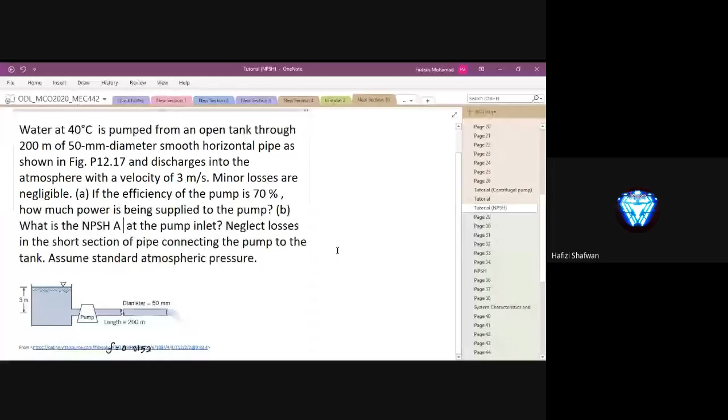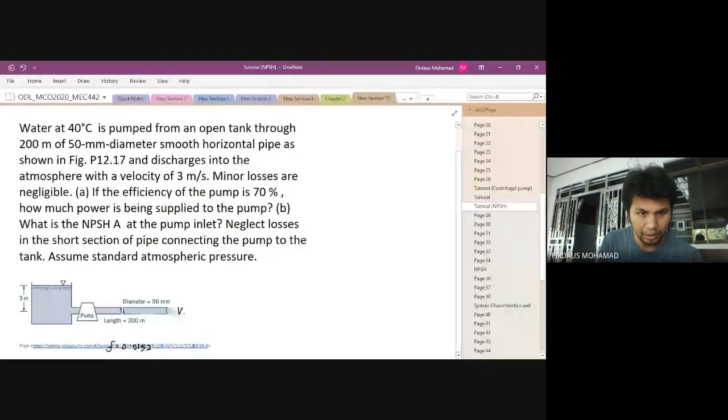Water at 40 degrees C is pumped from an open tank through 200 meters of 50 millimeter diameter smooth horizontal pipe, as shown in this figure, and discharged into the atmosphere with a velocity of 3 meters per second. So water will be discharged here, let's say this one, V2 is 3 meters per second.

Minor losses are negligible. So what is minor losses? In the video I already explained what is minor losses. Anyone can answer?

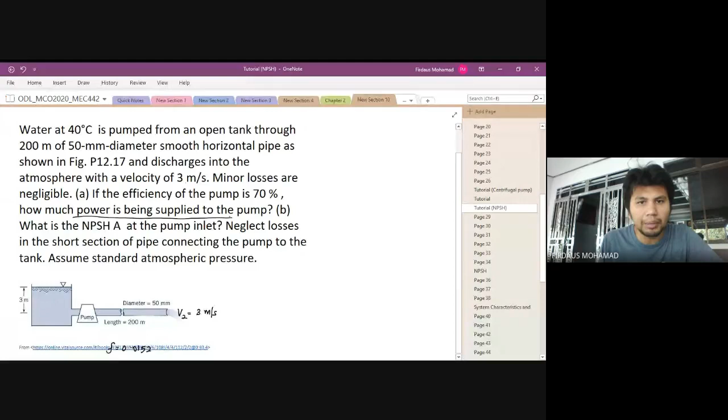So if the efficiency of the pump is 70%, how much power is being supplied to the pump? And then B, what is the NPSH?

Net positive suction head available at the pump inlet.

And then neglect losses in the short section of pipe connecting to the pump from the tank. Assume standard atmospheric pressure.

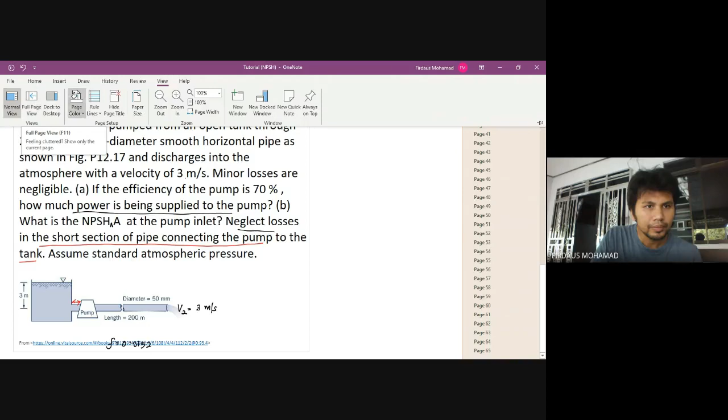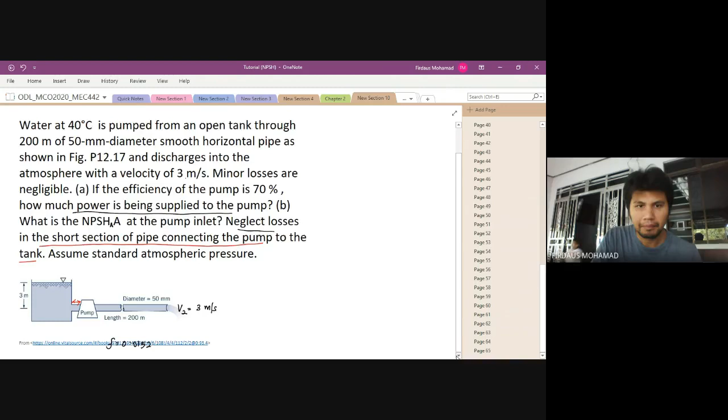So now, the problem statement. Given...

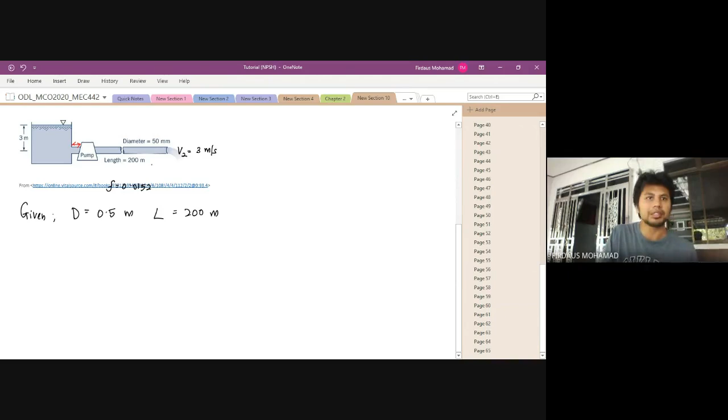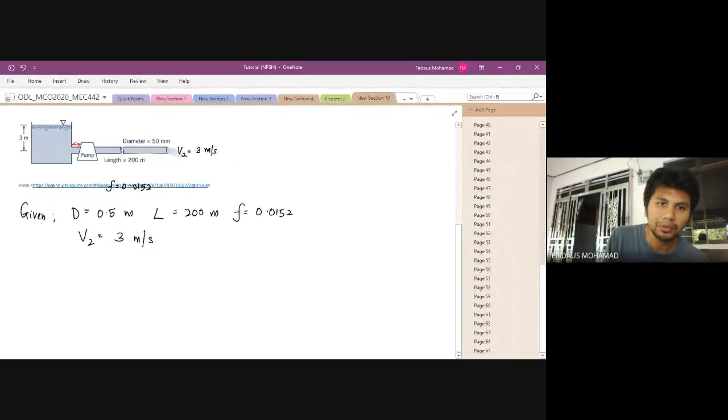Diameter for the pipe is 0.5 meter, and length for the pipe itself is 200 meters. And below there is F. What is F? Frictional factor, used to find the major losses. So F equals 0.0152. And then V2 equals 3 meters per second, the velocity for the water discharged to the atmosphere.

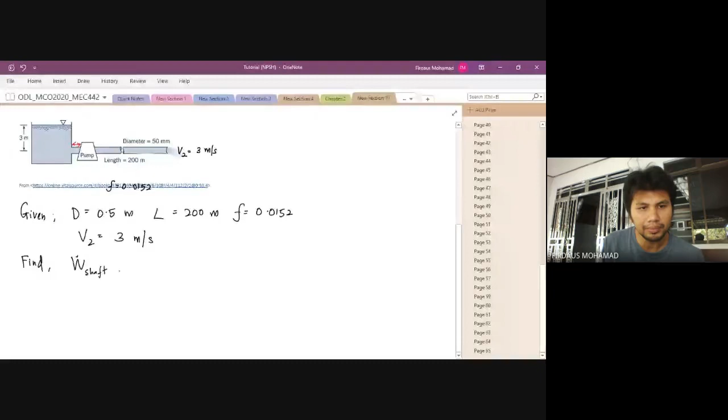So first, find this, W dot shaft. Second, B, this is what? NPSH available.

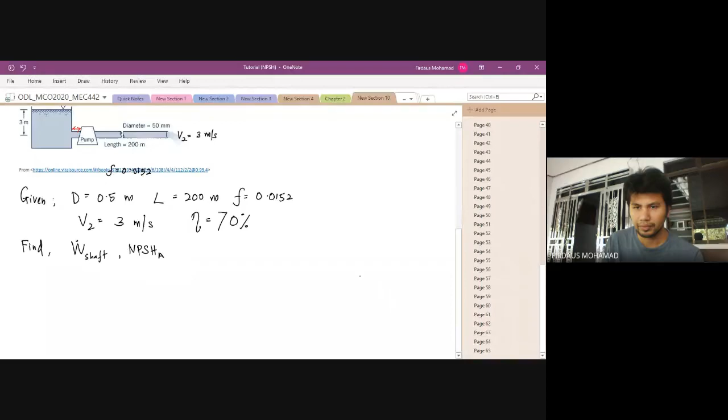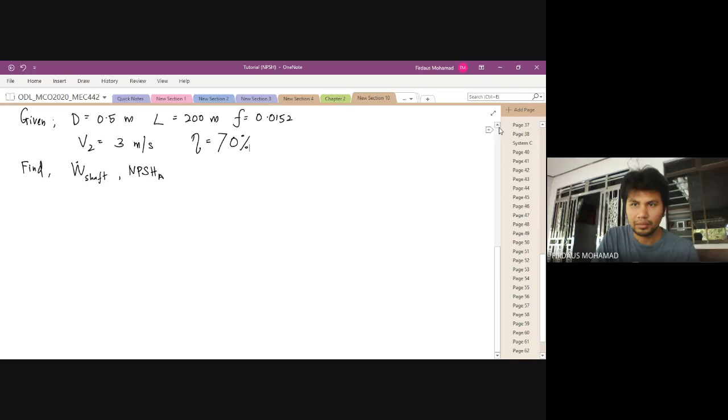So first, for the solution, first, how to find the W dot shaft.

So we know efficiency, check back in your notes, efficiency equals PF, power gained from the fluid, power from the pump, divided by W dot shaft - how much power is supplied to the pump from the shaft. So that means W dot shaft basically equals PF divided by efficiency.

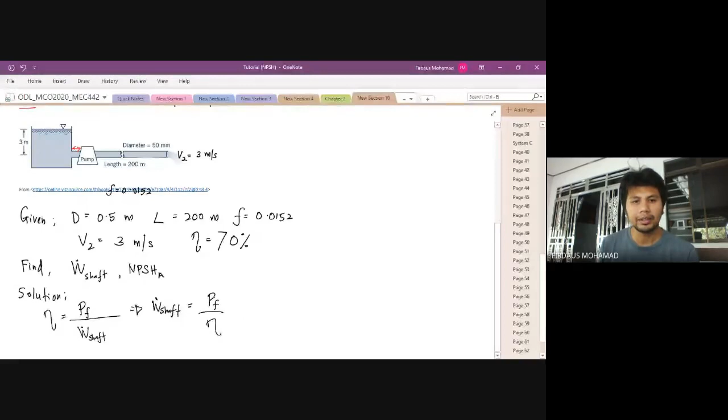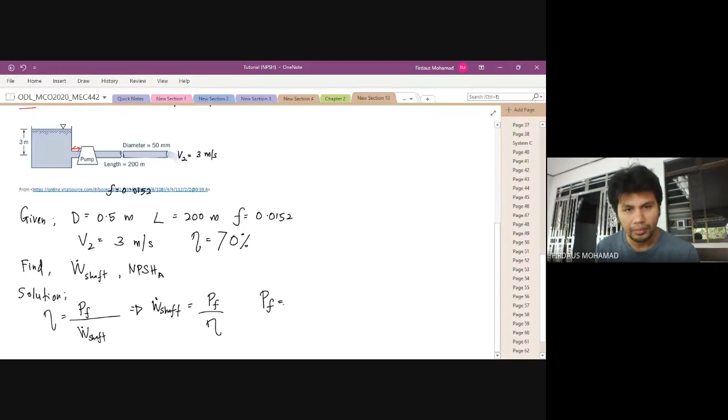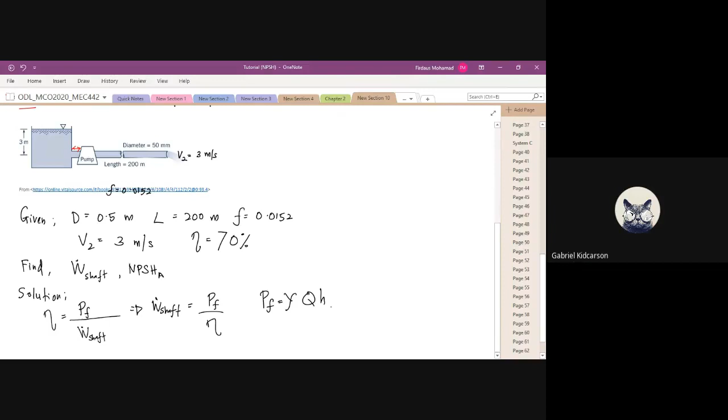And then to find PF, power for the fluid, PF equals gamma times Q times HA. HA or H pump - what notation do you want to use? Let's just use HA. So HA or HP is the same, head available for the pump or head pump. So gamma is specific weight, for water this is 1000 times 9.81.

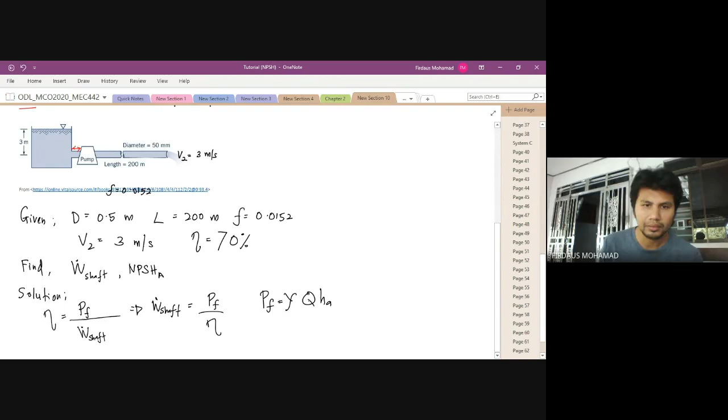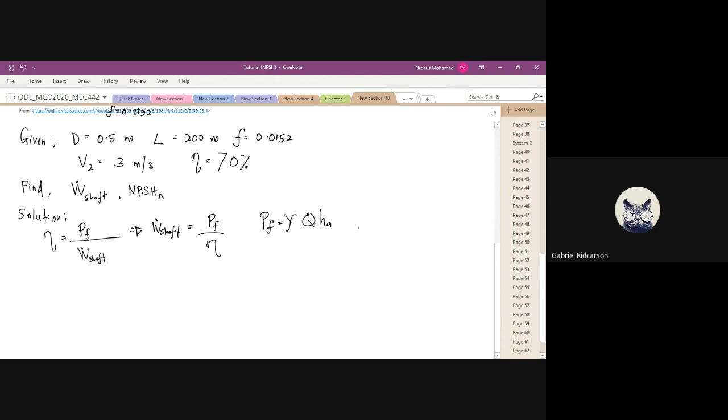Q, we can find Q. Q equals A times V. A comes from the diameter of the pipe. So you'll get area as pi d squared over 4, multiplied with velocity.

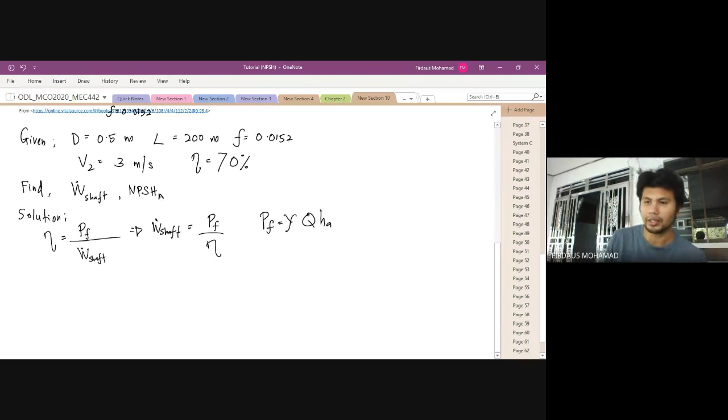So now what we need to find is HA, the head available for the pump. To find HA, let's look back at our schematic diagram. Let's say this is point 1, and this is point 2, the discharge point. So the Bernoulli equation...

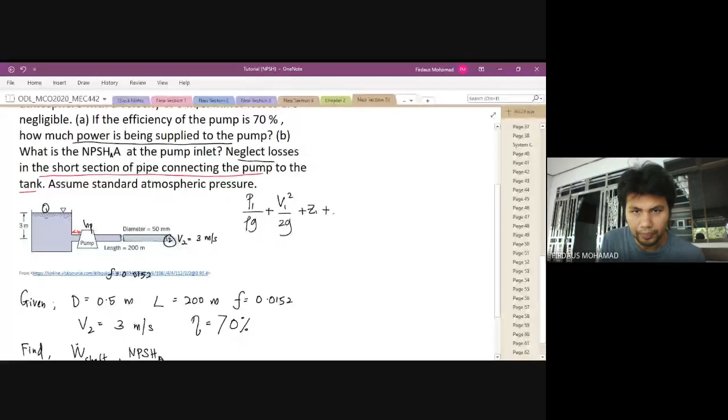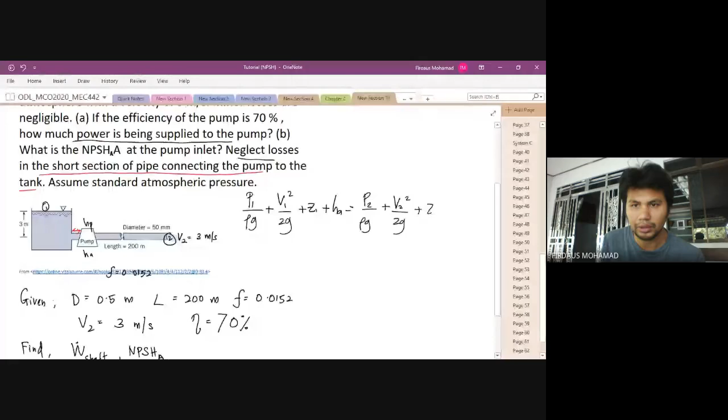P1 over rho G plus V1 squared over 2G plus Z1, plus head for the pump or HA, equals at point 2: P2 over rho G plus V2 squared over 2G plus Z2 plus sigma HL.

So HA basically equals P2 minus P1 over rho G, plus V2 squared minus V1 squared over 2G, plus Z2 minus Z1, plus the losses. What losses do we have now? Losses due to friction, the major losses: friction F times L over D times V squared over 2G.

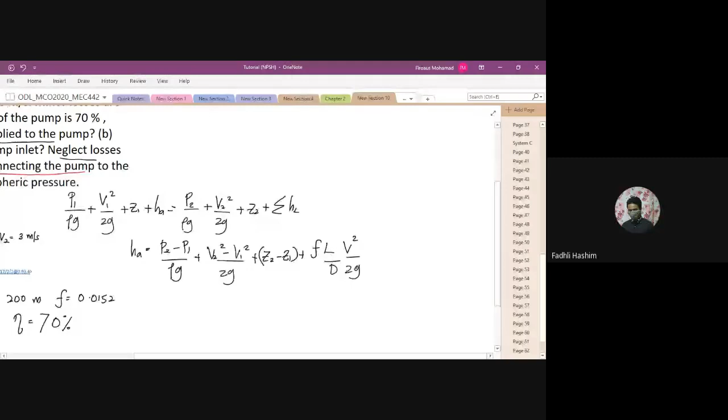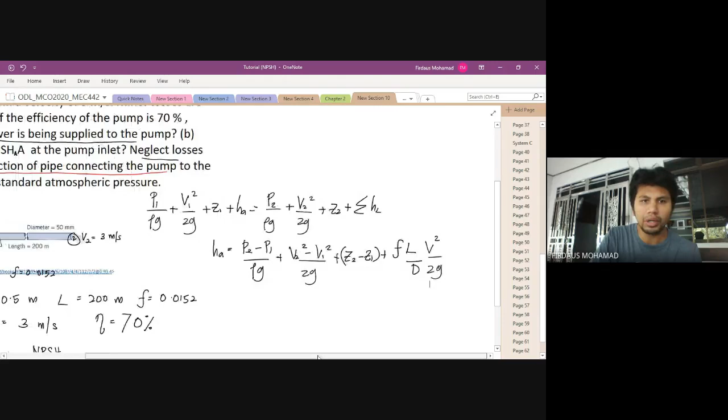Okay, now let's look back at the question. Assume all at atmospheric pressure, meaning P at point 1 is also atmospheric pressure, and P at point 2 is also atmospheric pressure. So P2 and P1 are the same, and we can cancel this since P2 equals P1, atmospheric pressure minus atmospheric pressure.

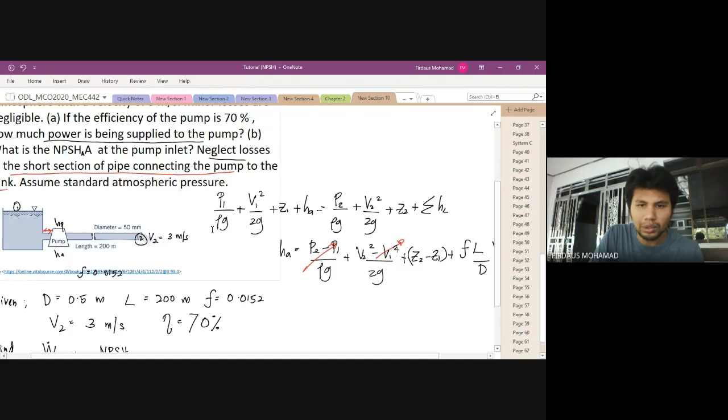And then for V2, we have V2. For V1, we have zero, because it's an open surface. And then Z2, we assume the datum is at point 2 - yes, he has already set the datum at point 2. So it's zero minus 3, plus FL V squared over D 2G for the major losses.

So now for the pump, head available for the pump equals V2 squared - V is 3 squared - over 2 times gravity 9.81, Z2 is zero, minus 3, plus F...

F is 0.015, length is 200 meters, diameter is 0.5. So how much is HA?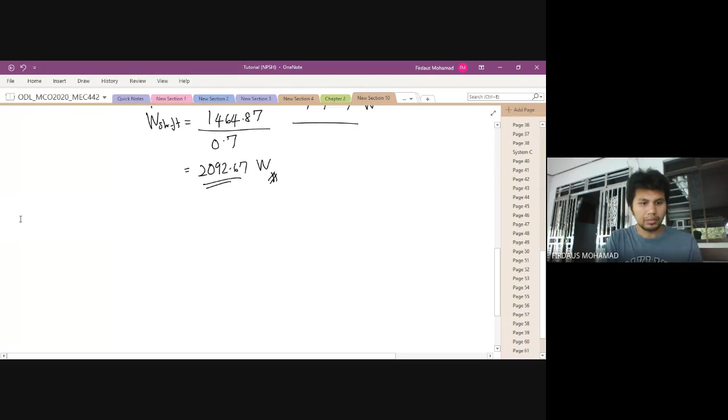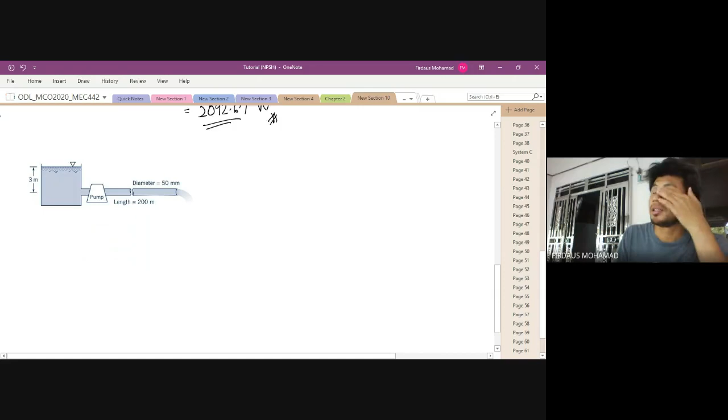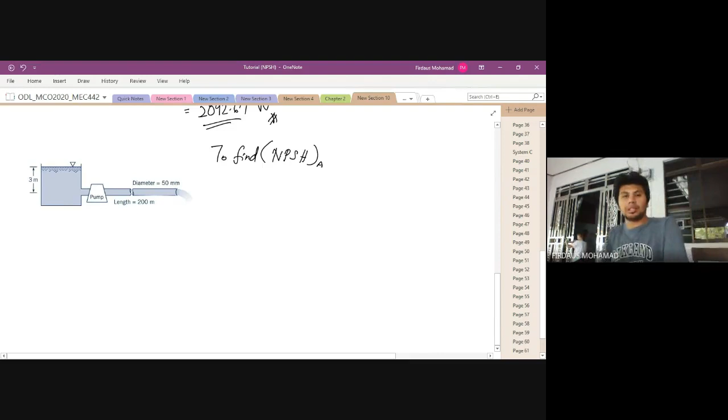So kita sekarang ni kita nak cari net positive suction head for the pump. Okay, so to find for this pump. Kenapa kita, why we need to find this NPSH? So apa? Why we need to find this net positive suction head for the pump? Dah tengok video.

Okay, so we need to find this net positive suction head because we need to find the vapor pressure for the water. Okay, mean that we need to find what is vapor pressure at that condition for the pump for the water, so that no bubble ataupun cavitation will occur inside, will happen inside the pump. Okay, once the cavitation happens, okay, so your lifespan for the blade, okay, for the pump will become much shorter. Dia akan damage your blade. So that's why we need to find this net positive suction head, okay, for this pump.

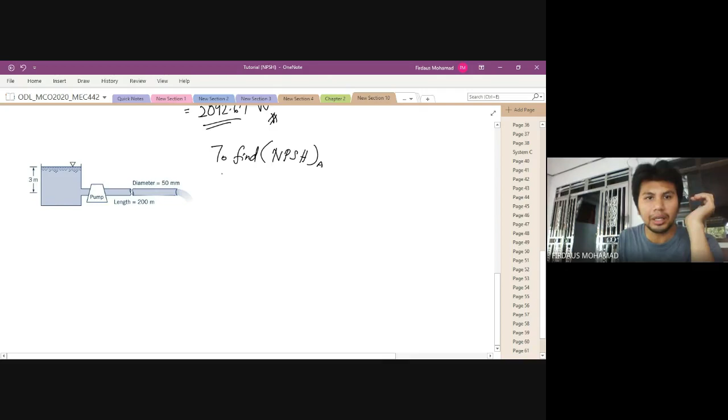Okay, so now given dibagi apa? Dibagi water at 40 degree C. Okay, so mean that you need to find what is the vapor pressure PV at this 40 degree C. So how to find the vapor pressure at 40 degree C? Kita guna apa? Kita kena guna apa? Nak cari water at vapor pressure, kena guna property table kan. So kalau thermodynamic atau thermal, you akan dapat property table. So sekarang ni you tak ada, you just Google.

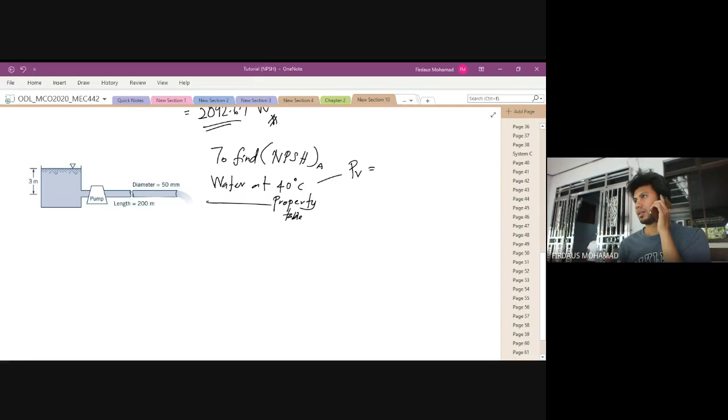So at 40 degree, kalau tengok property table, vapor pressure is 7.375 kilopascal. PV equal to 7.375 kilopascal. And then density for water at 40 degree C, density untuk water at 40 degree C, 992.25.

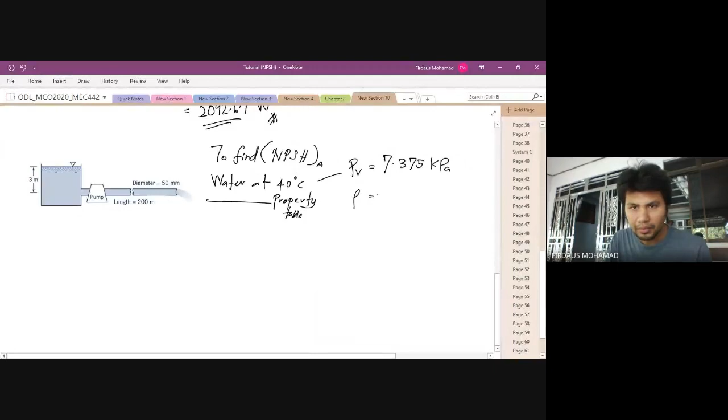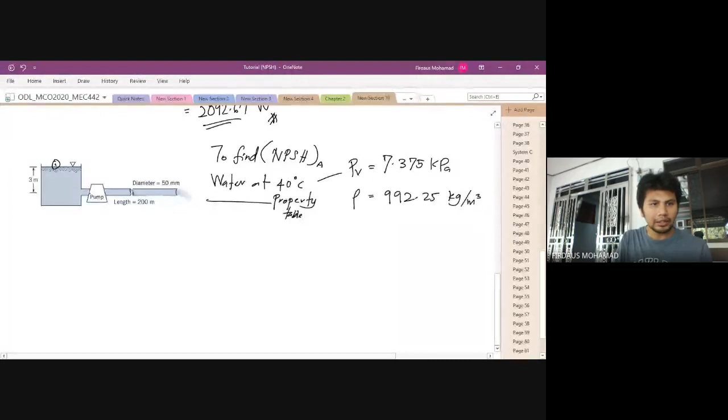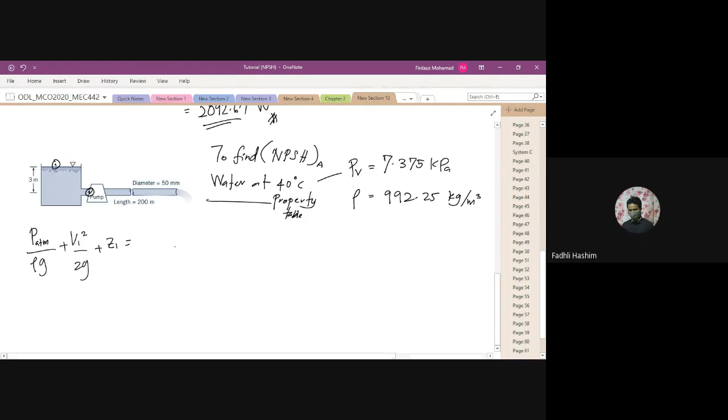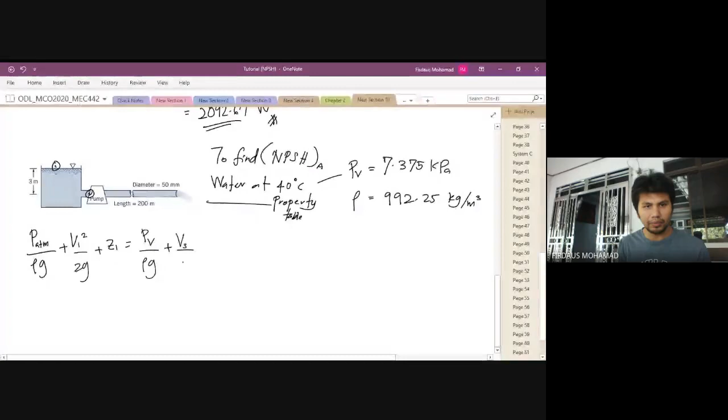Okay, so sekarang ni to find a net positive NPSHA. Okay, so first we set, let's say this is point 1, and then this is point 2, okay, at the inlet for the pump. Okay, so at point 1, P1 ataupun P atmosphere divided by rho G, V1 squared over 2G plus Z1, and then apa nama ni, Z1 plus PO ataupun PV. Kalau kita nak cari inlet pressure kat pump. Okay, so PV over rho G plus V ataupun V suction over 2G plus Z2.

Okay, so sekarang ni we need to find what is the, we need to find the NPSH available. Okay, so from this Bernoulli equation, you akan dapat, just rearrange, you akan dapat net positive NPSH available equal to P atmosphere minus PV over rho G, and then V1, V, sebab ni cancel. Okay, and then kita ada Z1. Okay, Z1, and then lagi? Tak ada? So Z2 kosong. So this is how to find the net positive suction head for this pump.

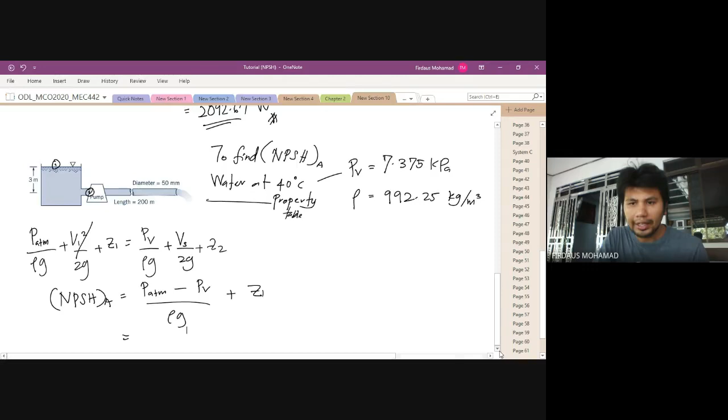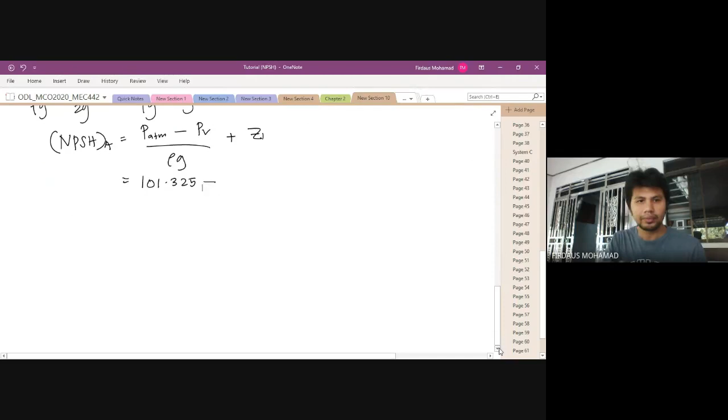And then P atmosphere, standard atmospheric pressure, 101.325 kilopascal. PV is 7.375 kilopascal, so now in kilopascal. Rho for the water at 40 degree, 992.25. G 9.81, plus Z1 is 3 meter. Okay, so you akan dapat net positive NPSHA for this pump.

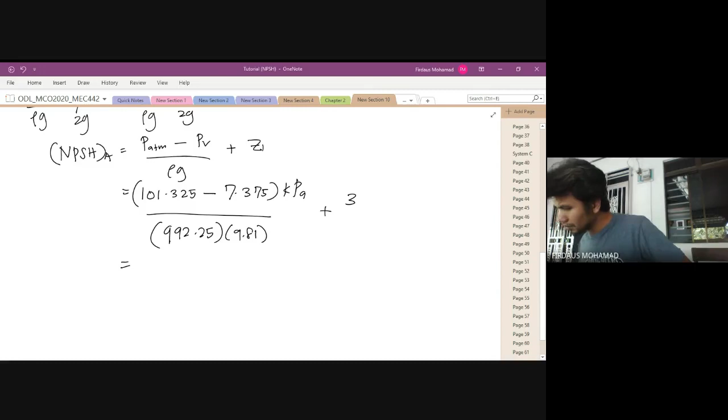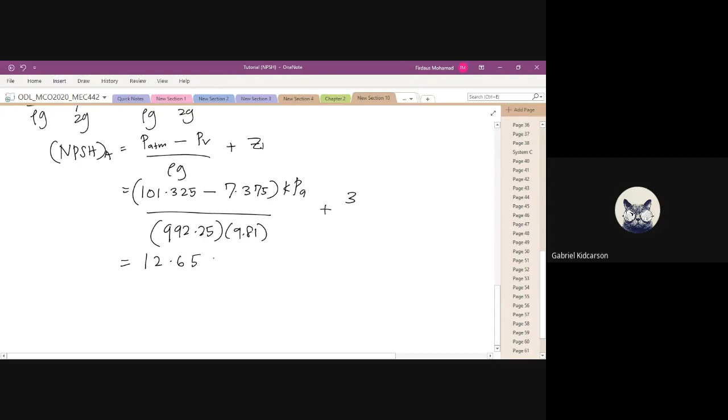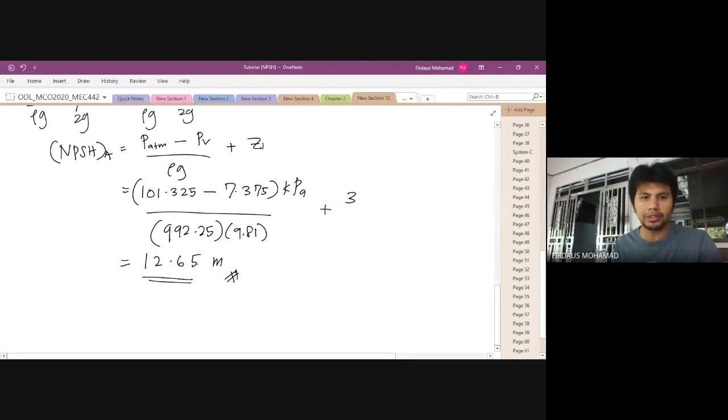Berapa dapat? 12.65, sir. Okay, sama. So the answer mana? So 12.65. Unit dia apa? What is the unit? Meter. Meter. Okay, so this is the meter. Maknanya the available, ataupun the available head for this pump, is 12.65 meter.

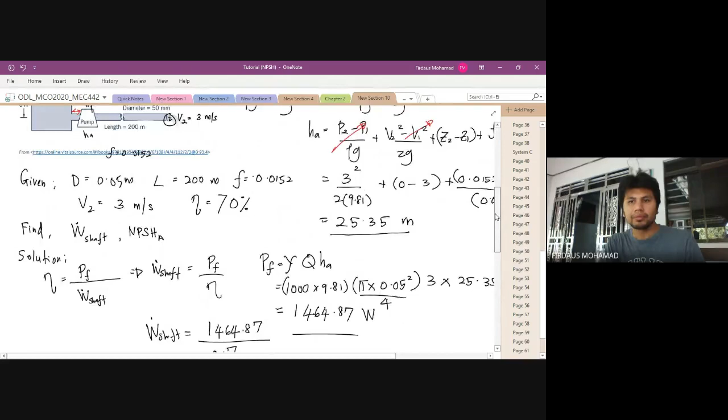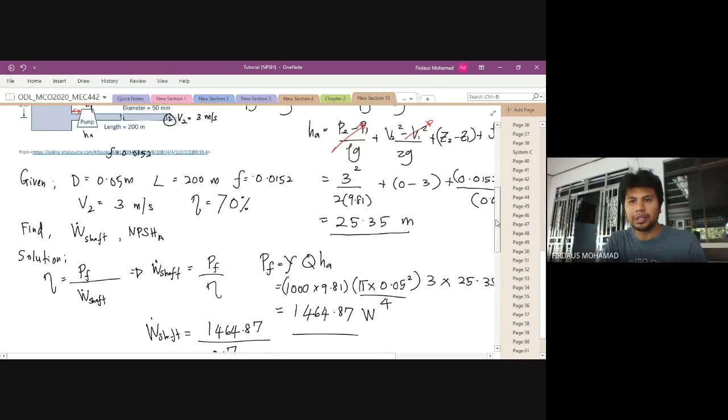Okay, so you boleh tengok ke atas ni. Kita calculate H available 25.35 meter. Maknanya it is above the NPSH. So kalau you tengok video sebelum ni, in order to have a good pump, you need to have the available head ataupun the head for the pump much greater than net positive NPSHA ataupun NPSHR. Quiet. So ada soalan?